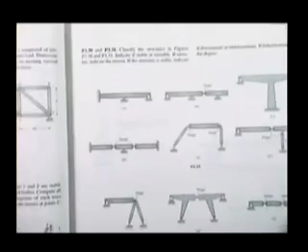A short, brief... just so you know, I've never seen anybody try and build something like this, so I don't think you have too much worry, but in your test, you should be able to tell if that is a statically determinate structure and if it is stable or unstable. You really ought to do it, I think, just about as much by feel as anything. Just counting joints and counting members and counting special conditions works a lot of the time, but sometimes those equations can mislead you.

You should know this is a cantilever beam. That's all it is, it just sticks out of the wall. They hold up nicely, you can imagine. Then all of a sudden someone came and added how many forces—not how many reactions, not how many pieces of steel, but how many forces. One is correct. So they put a roller underneath it, which causes one vertical force.

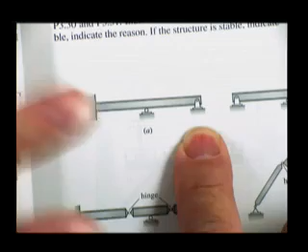Then on this end they put a pin, which caused 2 more forces. And so this is statically indeterminate to the 3rd degree, because it was fine as a cantilever till somebody started putting all these extra supports on it.

Now these extra supports are very useful. They make the structures much safer, because if it fails as a cantilever beam, it just falls in the water. But if it fails with it supported on these other pieces out here, you'll know it. It'll get a lot of failure in this area, and there'll be plenty of time to get off of it. So statically indeterminate structures are often made that way because they're very efficient, and also because they're much safer than statically determinate structures. There's a backup to a potential failure.

This is nothing but a simply supported... hey, yeah, that's right. This is nothing but a simply supported beam with an overhang.

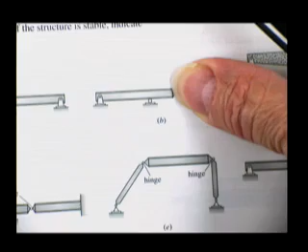And then someone took a thing that looks like that, which is not stable. You see it won't fall up and down, but put some loads on it, and there's a good chance it will rotate about that pin. To prevent the left end from moving up and down, and therefore to prevent rotation around the pin, he hinged it to something that's stable, and he's turned the whole thing into a stable structure.

For this one here, that would have stood up nicely as shown. Wouldn't have needed anything else. It'll just stay there, be a nice little roof structure. You can put it next to a bus stop and get underneath it. It's fixed to the ground.

And then someone came and added 2 forces. By adding 2 forces, they made it statically indeterminate to the 2nd degree.

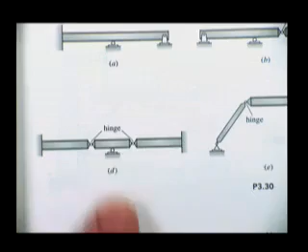This one here was a nice pair of cantilever beams, and somebody came in with a filler beam in between there. Had they hinged the left end of the filler beam on the left end, it would not have moved up, down, left or right because of the hinge. And then the right end would have flopped down to the ground until they added this right hand hinge.

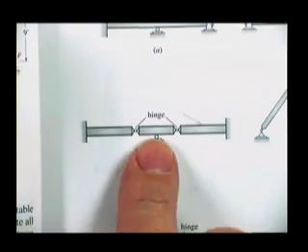At that point, it's statically indeterminate in the axial direction, because if I were to put a force on here like this, you really wouldn't know how much of it came out this end and how much of it came down through this and out through this end. So it is statically indeterminate to the 1st degree.

Now he could have prevented that by putting a roller and then putting the beam across the top like that, and then hinging it to this. That would have left this just as a simply supported beam by itself without any axial capacity.

Then you could have driven on the beam. And I'm not saying you'll get all of these right away, but you get a feel for them, and they're not that bad.

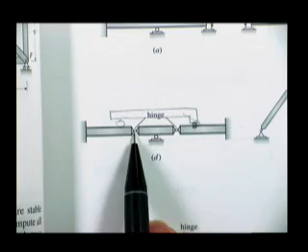By hinging it on the 2 ends, it's statically indeterminate in the 1st degree, before this guy comes around and messes with it.

And the next thing is he came and decided to put some more supports on it. He put one more support, so it ought to be statically indeterminate to the 2nd degree.

How about this one? What do you think about that structure? If you push on it to the right, what do you think would happen to the hinges?

They'd rotate, it's just that simple. Once you put a load to the right on it, this thing says, well, is it okay if I do this? And the guy says, well, no, you can't do this unless it's okay for me to move to the right. And he looks down here, and this guy says, it's okay with me, you want to move to the right, that's no problem. And so it is unstable.

Have I ever seen anybody start to build one of those and then say, oh wow, let me see if it's unstable, so I won't build it? No. And that's pretty unusual.

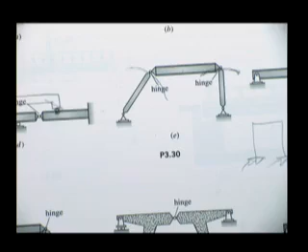Usually what you make is you make these things here, or you make these things here. That's usually the kind of things you do.

Then just start taking things off and see what's left. If I didn't have anything but that, would you tell me to duck? Well, I would hope you would. You may not, but I would hope you'd say that's not stable. The right end is nicely supported, except it can move left and right, and the thing could rotate about that point, so no, that's not a safe structure.

So somebody decided to do this to it. That at least keeps it from rolling about this point. Axial force is in here. However, it's still possible if you push to the right, the link would roll to the right, and then that axial force could not be taken because of the roller.

And the guy says, well, you haven't let them see everything yet. Well, okay, that's true, but right now, it's still unstable.

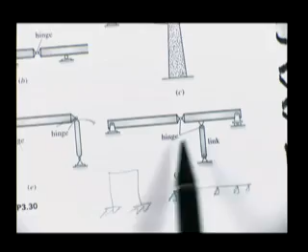And now then, here's that last force we're looking for. Horizontal forces through here will go through here, will not go through the roller because it's a roller, but will come down here in tension. And here's just a plain old beam, a simply supported beam. The right end of this simply supported beam is supported on something that won't move up and down, and the thing that could sadly move left and right can no longer move left and right.

Statically determinate, and it's stable. There's a truss—probably the simplest truss on earth. And it won't fall down.

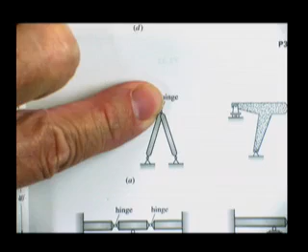You've seen trusses forever. Somebody came in and added another member to the truss. This thing was happy to stand as it was before you put in this additional axial force. So you are causing one more reaction, one more degree of indeterminacy, if there was any in the first place. There wasn't any in the first place. Therefore, you've added one. Wouldn't take you long to figure that out.

Once you cut this hinge in order to sum some forces vertical and some horizontal, you'd say, I got a problem here. I have two equations and three unknowns. So it is statically indeterminate to the first degree.

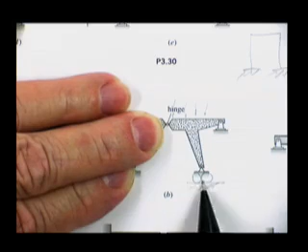That one would stand up by itself. It's hinged and it's got a pin. The truth is, if you would even change that to a roller, it would be okay, because when you put loads on top of it, it would tend to roll down, except this guy wouldn't let it. As you start adding things to it, you're going to add degrees of indeterminacy. So when he changed that to a pin, it became statically indeterminate to the first degree.

Then this one, it was okay because it was pinned. If you say the roller might lift off the ground, remember these rollers are made so that they can take tension. This is nothing but a convenient way to show you that the support is purely vertical—it'll take tension or compression.

Then when you put them together, you make it more degrees indeterminate. It's not hard to see if something's indeterminate, because once you try and solve for the forces, you can't do it. That tells you right off the bat it's statically indeterminate. Some of those structures we'll analyze by hand. Others, as they start getting ugly, you just don't have much choice but to go to a computer program and let it analyze the problem for you.

So, enough of that. We'll talk about more statically indeterminate structures later.

Trusses. Two basic ways to solve for the forces inside of a truss.

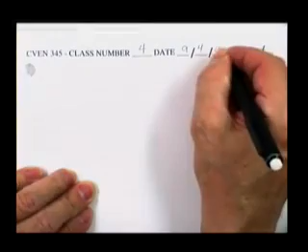Here's a truss. Typical.

I'll leave it for you to solve for the reactions.

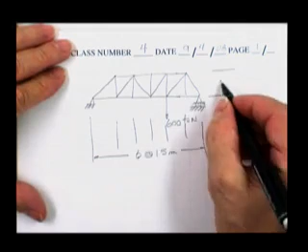A lot of times they'll show you the distance on each one of them. Sometimes they'll merely say 1, 2, 3, 4, 5, 6 at 15 meters, and you're supposed to know that's 6 equal panel spacings at 15 meters each. Height, 20 meters, not drawn to scale.

The first method of analysis you were taught for trusses was method of joints. Hopefully it was impressed upon you that cutting out joint J at this time was a futile exercise, because in order to isolate the piece of steel, the little pin at J, you cut through 5 members, thereby exposing 5 unknowns. May be useful later on, but at this time, too many unknowns.

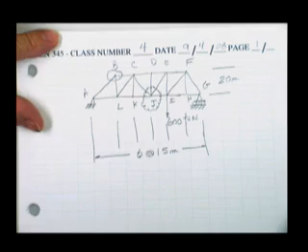At this point, it is futile to cut out joint B, because in order to isolate the piece of steel at B, you had to cut through 3 members. Those 3 members all have an unknown force in them. You only have 2 equations of statics, sum of forces horizontal and vertical. You've lost your sum of moments equation because all the forces go through point B.

So plan on it: if you want to use the method of joints, you'll have to cut out a joint that has no more than 2 unknowns coming into it. If you've already worked this member from earlier work, and this from earlier work, and this because it's a zero force member, then you could solve for these 2 by method of joints, because you only have 2 unknowns coming into the joint at that time.

The reactions on this structure, as I say, I'll leave that to you: 400 kilonewtons and 200 kilonewtons. And the reason I know that is because this is 4/6 of the way over to the support, so this is 4/6 of the load, and the same way in reverse. But you're more than welcome to just sum moments about A to find the answer for those reactions.

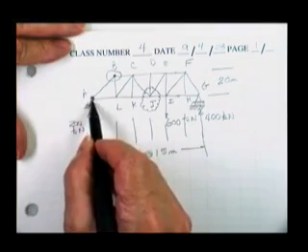That tells me that quickly I probably have the ability to solve for forces in the members entering this joint, because there's only 2 of them, or this joint, because there's only 2 of them. For no reason whatsoever, I'm going to tell you I'm looking for the force in member FG.

In order to solve for the force in member FG, you must cut member FG, thereby exposing the force in that member. Then you go ahead and cut around the joint, cutting as few additional members as you can, and cut through the reaction, and cut through any external loads—the lines of gravity through those loads—and isolate the joint.

Here's what the joint looks like. Joint G has a cut steel piece and a cut steel piece and a reaction: 400.

The slope of this member needs to be shown on the member, either here or on the original drawings. It needs to be somewhere. It has a horizontal slope of 15 and a vertical slope of 20, so that's a 3, 4, 5 triangle.

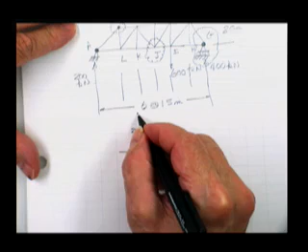This is horizontal, so I don't need to show anything on it. As soon as you cut through the piece of steel, you need to put an arrowhead on the unknown. That's normally a guess, sometimes better, sometimes worse.

Crawford, which way do you think it goes? Pretty... No.

Even though it tells... I know, I do too, but I'm okay because as long as I'm talking, I don't nod off. Also, I've already passed this class.

And it has been guessed intentionally, and that may be wrong.

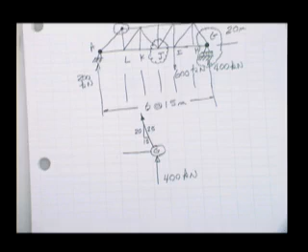Now then, I'm going to guess that the force in this member is also tension, and it's a pure guess. Right or wrong, I don't know - I mean, I do know, and I think you know too. But if you say those are some pretty bad guesses, yeah, but I want to make sure you know what to do when you don't know what to do.

Just have to guess and put some arrowheads on there. I get all kinds of students who I ask, how come you didn't work the problem? Well, I didn't know which way to put the arrowhead, so I didn't want to get it wrong. But you've got to put the arrowhead.

When you sum forces vertical, you've got to commit. I say it goes this way. If you're wrong, your answer will come out with a minus sign. The minus sign won't mean it goes down, left, right, or up - it won't mean anything except you're not a very good arrowhead guesser. Put it on the other end.

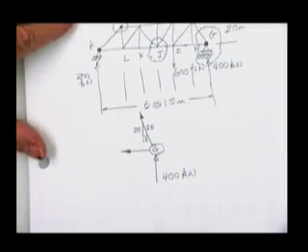And it has to have a name. Probably a reasonable name for the force in that member would be FG. You can call it dog, but it's a little harder to figure out where it belongs. And this would be HG. It has to have a name.

Especially in this class, you'll be doing a whole bunch of these. And people who say, well, I've got 4 free bodies there, and I used this one for a while, then I went over to that one, then I came back to the first one, and then I went over there - I can't follow your work.

If the answer in the box is right, you get full credit. If it's wrong, you get nothing. When you bring your paper up and say, look, I only have one little mistake - I took the horizontal component of this as 20/25 by mistake.

Well, sorry. You need to tell me, hey, boss, yes, I'm using free body number 1, it's okay with me, and my first equation reads... and then if you get down somewhere and get an equation that doesn't do you any good, you can't proceed, and you move to another free body, then you tell me, equation 8 is using a new free body. Then I can follow your work step by step.

Where you make a mistake, I can take off a point or two, that's all I'm going to get, and then I would assume that everything you did from then on is not incorrect, based on what you've already done.

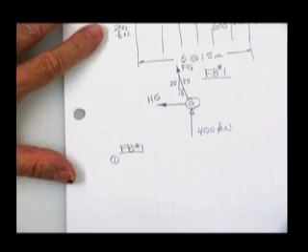Yes, you can sum forces horizontal, and yes, it'll be useful later, but there's only one guy that's got a vertical up and down component to it - only one unknown. So I would suggest you sum forces vertical is equal to 0, is equal to plus FG.

And then you say, well, now wait a minute - I'll admit FG kind of goes up, but all of FG doesn't go up. Just a piece of it goes up, and that is correct. Only 20/25 of it goes in the vertical direction.

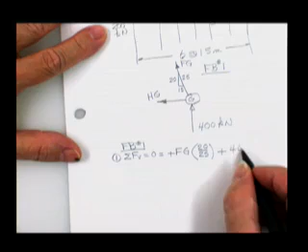Plus the reaction is 400, and therefore you can solve for the force in member FG, which is equal to minus 400 times 25 over 20. That's 2 into 40 is 20, 20 times 2 and 25 is 50, so it's 500 with a minus sign.

Now what you do with that is your business. You're welcome, and appropriately or legally permitted to go write that the answer for FG is minus 500.

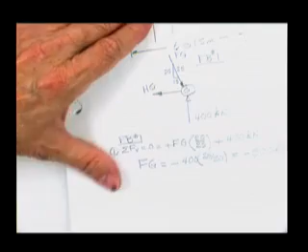But the number of people, students and practitioners alike, who'll miss the minus sign later on are numerous. I'd really suggest if you find an arrowhead wrong, you don't have to tell everybody, just go put it on the other end, and then no one will ever know you're not good at guessing arrowheads. It kind of makes sense, since this thing goes up, this guy probably goes down. Then you need to change your sign, so if someone checks your work, he doesn't see a plus where the force is going down and count off. Change the sign for FG, that changes the sign for the answer, and that means leave the arrowhead alone. It also means that the force, since it is pushing on G, is a compressive force.

Most especially in this class, it tells you whether the member will be getting shorter or longer. Lane, which is it? Will the member get shorter or longer?

Shorter. Look at that, what a good guesser he is. He had no idea in the world. You can put your quarter back in your pocket. Came up heads, and it served you well. Being in compression, the member does get shorter.

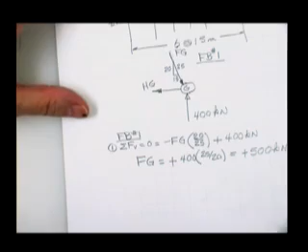Do I care if you sleep? Well, not really, I hate to admit that. Does it bother me? You really don't. But I'll tell you, I only got through one class because the guy was merciless with me. He would throw stuff at me, he'd stick chalk up my nose, and that's the only way I ever got through that class. So I'm going to try and do that with personal friends like Lane. Who was the other one? I forget.

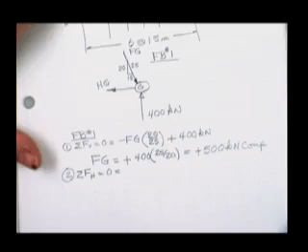All right, so now then we have that force. Thank you, ma'am. Equation 2 reads, sum of forces horizontal is equal to 0, equal to minus HG plus... I wish I had listed that answer on the free body, it would have been smart, because then I wouldn't have thought it's unknown. I should go do that now.

500 kilonewtons. I probably wouldn't put compression on this because it is shown pushing in compression. Plus Fg, which is 500. But not all of the 500 points in the horizontal direction.

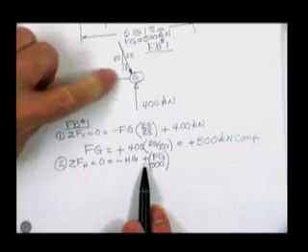No. All right, well, let's see. Oh yeah, I was asking you how much of Fg points in the horizontal direction. Now, that really is something that everybody ought to know, but you really should. The horizontal component of this slope triangle, which is a 3,4,5 slope on the triangle, is in the same proportion as the components of the load. So Fg does point to the right, hence the plus, but only the horizontal piece of it points horizontally. In other words, 15 out of the total of 25 available.

Now, you may not have done it that way. You may have said the tangent of this angle is 15 over 20, written the angle in there, and then multiplied this times the sine of that number of degrees. You're welcome to do that if you want to, but that's a long, hard way to do business.

Morales, how would you do it? Mumble, mumble. So that's an old trick, you mumble mumble, and the guy, you know he's old and deaf and can't hear, and they say, that is correct. You would multiply it times 15 over 25. And you say, thank you, Lord. I know.

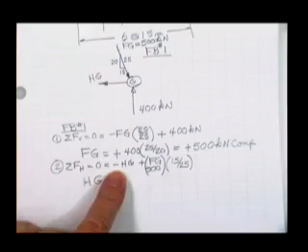ΣF horizontal equals 0, so we ought to be able to solve for the force in member HG. Whatever that force turns out to be, I have little interest in it, it's a calculator problem now. The minus sign will turn around to be a plus on the other side, so it will turn out appropriately shown. The arrowhead does not need to be reversed. It is a tension force in the member.

Now, the only other thing I would do is go ahead and show you a free body for joint F, just to make sure you know what to do with what you've already solved for. This is an exercise in futility, because cutting joint F has exposed three new unknowns. Even though one of them is now known, that means we're not going to get answers, but at least I want to make sure you can properly draw the free body.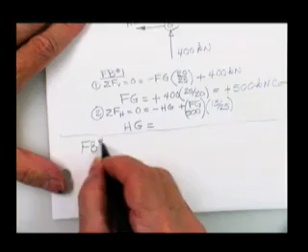Here would be free body 1, here would be free body number 2. Here's the piece of steel, marked F on the end of the pen. You cut this piece of steel open. It is your choice, pick an arrowhead. I will tell you that for most trusses normally loaded, the entire top of the truss goes into compression, and the entire bottom goes into tension. That's normal.

Other loadings can cause other kinds of things where that doesn't turn out to be the case, and you shouldn't get so enthralled with the general rule that when your answer comes up with a minus sign, you don't listen to the minus sign.

Yes sir, for the homework problems on method of joints -- yes sir. If I were to write a MATLAB program that just solved it, can I hand them the code? Not really, and the only reason I say that is...

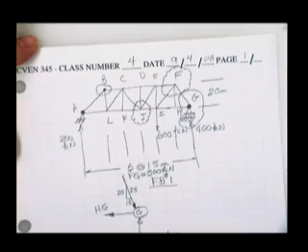Because everybody already has access to a structural analysis program called Visual Analysis. Some of you have already learned how to use it in other classes. And then I'd really have to say, well, it's okay just to stick it in Visual Analysis. The real problem is when you get out in practice, you're not going to have that available to you. If you say, you know, when I get out there, I already know how to do that, and you're just wasting my time, I have to apologize -- you may be right, there may be some truth there, but I don't know how to really make everybody do this except by hand at least once in their life.

Okay, all right, so it's your choice. I'm going to show it pushing, just because the top of most trusses are in compression. I'm also going to give it a name, EF. I have also cut this member here, his name is IF or FI. I do not know which way it goes, so I'm going to absolutely guess. Well, I didn't know which way this one goes either, so I'm guessing both of those arrowheads.

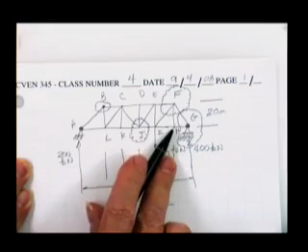Then I cut through FH or HF, depends on whichever one I wrote first on another free body. I wouldn't want to call this force FH here and then call it HF later in my work. They are of course the same number, same answer, but you're liable to get lost somewhere. Whatever you call it, if you call it FH now, later on you ought to call it FH again. This guy is FH, and that is an absolute guess.

And only on the next one, FG, are you stuck -- you have no choice. On this one you must show it as a pushing arrowhead, because that's the truth. That's the first truth we found, but it is truth, and therefore this one is required. I don't know how... maybe I'll just put several arrowheads on there. I mean, there's no question about it -- it's got to be shown as a pushing piece of steel.

Now if you say, well wait a minute, you showed it down on this one and up on that one -- no, I didn't. I showed it pushing on this one, and if his feet are pushing down on this joint, his hands are pushing up on that joint. And then, of course, it has the name FG, because that's what I named it earlier. I don't think calling it GF is a wise move at all.

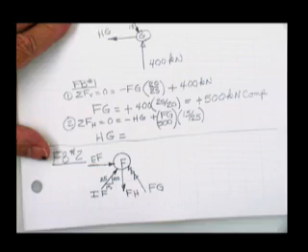The final thing this needs to be a free body is this needs to have a slope on it. It's poorly drawn to scale -- that's a 15 by 20 by 25, you could go ahead and revert that to a 3-4-5 if you want to. And this one also has the slope 3-4-5.

You would then sum some forces horizontal, some forces vertical. You would, of course, find that you cannot solve for all the forces because you have too many, and we knew that was going to happen.

Now, some of these members can be found just by looking at them. You can just tell what the force is. Here's an example. Well, let me show you a more general thing, and we'll go back to this.

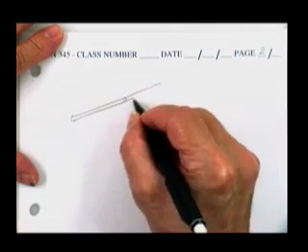Here is a member, and here is another steel member, and they are collinear. They are pinned on the ends, and they are pinned together, and they're supposed to be straight. Normally I wouldn't care about slight discrepancies like that, but I really have to emphasize the fact that those two members act along the same line. I don't care how they're sitting in the structure, but they're in a straight line.

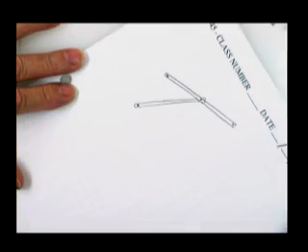If a third member comes into a pair of collinear structural members, the force in that member must be zero. This is called a zero force member.

And the reason is, I'll let you put any force you feel like. You say, well okay, I'll just put 100 pounds. Then if you put 100 pounds, with theta as the angle, you're going to have 100 cosine theta acting on the joint because of this member, and 100 sine theta acting in this direction. Now you can throw away the original member.

This is unacceptable. You have a force pushing up, and you have these two members. One of them is doing this, one of them is doing this, and here you are doing this. There's no way these two horizontal forces can take this vertical force because they don't have any downward pointiness to them to accept that.

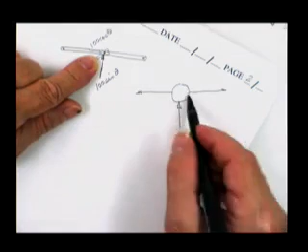If you sum forces vertical right now, it's equal to 100 times sine theta minus nothing. Nobody can take that vertical load. You say, well okay, I won't put 100, I'll only put 1. I don't care if you only put the weight of a fly's eyeball - you can't take a component normal to those two members.

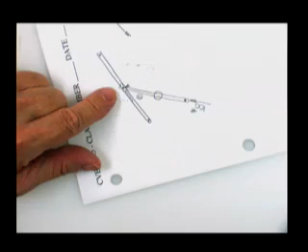So I'll tell you now, if you ever see a structure where there are two collinear members coming in with no applied forces - if there are applied forces, this rule drops off - but if you see two collinear members and a third member coming in, it has no force on it at this time. Now, a lot of people say, well what's it there for, why did we buy it? Well, later on, when the loads move to a different spot on the truss, it may well be used. But right now it's got no force.

A corollary to that, or simplification, is listed in our book first. If you ever have a member with another member coming in like this, and there's no force on the joint - we only put forces on the joints - then those are both zero force members. The reason being, if this member had any force at all, it would have a vertical component. If it had a vertical component, you could not satisfy sum of moments about this point, because that force acts right through this point, so that's zero.

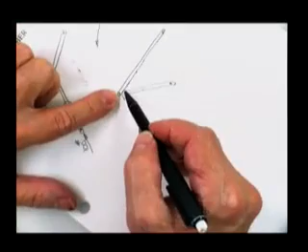And by the same token, if you had this member and you're trying to see how much force is in this one, if I let you put a pound in there, it'll have 1 pound cosine theta, and that will cause rotation about that point, and that's not permitted. You can also look at it as this being the same as this.

There used to be another member here, and there are your two collinear members with somebody coming in at an angle and no other forces acting on it. That's a zero force member. You say, well but there isn't one there. Well, it's okay with me - the rule still applies. Just because you took away that member, you just made it even more zero.

And by the same token, here are a pair of collinear members. If you don't want that one in there, if you want to take it off, that's acceptable too. Here's a pair of collinear members with somebody coming in at an angle. That's a zero force member.

Hence... you'll have to bear with me a few times here.

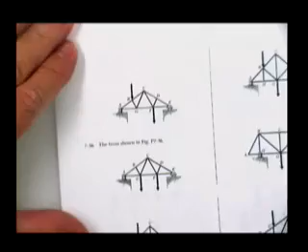Give me a zero force member. BG? The rule won't apply there because on this end of BG there is a force. Those forces make the rule go away. But you might say, well, check the other end.

When you check the other end, the rule is broken because you have another member coming into the joint. DF, I agree, DF is a zero force member. It looks like it's coming in square with those other two, but I don't care if it comes in square or not. If it comes into a pair of collinear members, there's no force in that member.

Now how about this one? The rule breaks down because there's a force here.

How about this one right here? Give me a zero force member. DG, FG. Now, because that member is zero and could be removed...

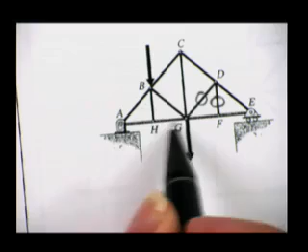DG, that's correct. And who else? BH, that's correct, because on this end there's a pair of collinear members, so that's zero. And I believe at that point the rule falls apart, because if you try for CG, down on this end it's a mess. There's all kinds of stuff going on down there. There can be no members coming in and no extra forces coming in.

All right, how about this one? This is the one I got, yeah. DH, BH. I like BH, not because of the top end, because of the bottom end.

Now students will look at that all day long and say it's impossible. Where did that force P go? Well, I don't know, but it didn't go down BH, because on this end of BH, these members can't support it. So there's zero force in that member.

So where did this go? Well, I guess it went down this side and down that side, because it didn't go in BH. And I don't see any more zero force members in there.

How about this one? BG is good, keep going. DF or FD is good. And I think that's about all you're going to get.

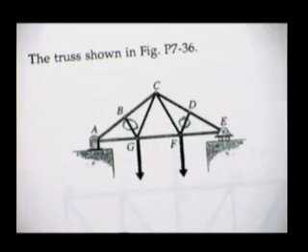GC, those do start becoming obvious. AB is good, and AH. Again, if you want to pretend that this member AH has a buddy sitting out here, a pair of collinear members with somebody coming in, it's zero, and then you can throw it away and the rule doesn't change. It's just that member is also removed.

By the same token, if you say, here's the member I'm talking about right here, and this is the guy coming in at an angle, the other one is zero. And I don't see any more.

EJ. BJ, I buy BJ. HF, very good. EH, now wait a minute, there's a bunch of members coming in here.

Let's check the other end, he says. Okay, I checked the other end and you're right, because this is a member coming into a pair of collinear members, EH is zero. DH is also true because now EH and FH can be erased, leaving DH as a single member coming into a pair of collinear members.

And of course the question definitely becomes, what's all that steel for? Well, when these trucks get around on this side, or there are heavy loads on the top of the truss, that steel will be used. They're just not being used now.

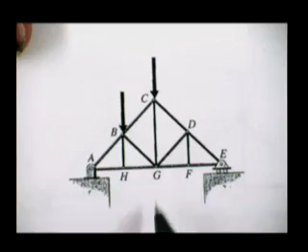BH, I buy that. DF, I buy that. DG, because you can now erase DF, DG becomes a zero force member. That's correct.

And one last one: DF, CF, CG, BG, HB, and AH. That's true, they're all zero force members.

They have no choice. You're welcome to solve for them if you want to, but it takes a lot of time, and on the FE exam, you don't have a lot of time. They love zero force members on there because they figure you ought to just be able to point them out.

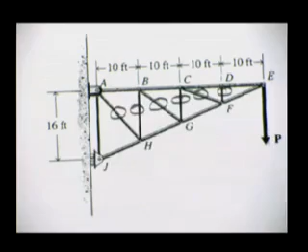Now, if you say, well, where's the force going? It's evidently going down this member in compression and probably pulling on this thing in tension, and these right now are not being used. When that force P is back here at this joint, or this joint, or this joint, they'll start being used, but not right now.

The second method of analysis, you can use the method of joints all over the place. You can follow from joint to joint to joint, and you can usually get answers all the way across the structure. Every time you move to a new joint, you do take a chance, because the first time you made a mistake, that mistake's then going to follow you along through all the other equations.

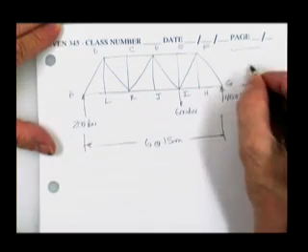Now, if I ask you to solve for the force in member DE, to get there by method of joints would take a while. You'd have to start out here at G or A. Without a doubt, you'd start at G because it's closer, but it'd still take you a while to work over there.

Method of sections has the advantage that you can usually get an answer immediately. Plus the second advantage, it doesn't depend on much previous work. Now, if you have these reactions wrong, then obviously you've got a problem.

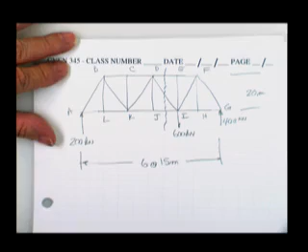To get the force in a member, for example DE, you cut through DE. That exposes the force you're looking for. You then cut on through the structure as inexpensively as you can, cutting as few additional members as possible, hopefully 3 maximum total, because that's all the equations you have.

And you draw a free body of that substructure. That substructure looks like this. There's joint E, there's joint F. Here is each of these members, approximately cut in half around the middle. Here are the loads. Here are the slopes—the only ones I care about are the ones that are exposed.

That's a 3,4,5 slope. My guess on the arrowhead on this one will—if it's on the top, it'll always be compression, as it usually is compression. I won't get so attached to it that if the answer comes out minus, I'm not willing to change it. And it has to have a name, DE.

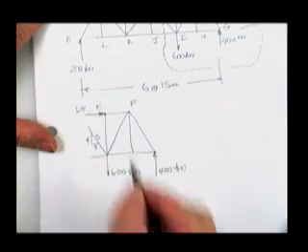I have no idea which way this arrowhead goes. Anybody want to guess whether it's a tension or compression arrowhead? Tension, so we'll show it as a tension arrowhead. His name is DI.

And finally, these on the bottom are usually tension. And his name is JI. It has to have a name.

It's free body number 2. Why is it free body number 2? Because the whole thing was free body number 1. That's where I got the reactions from.

You have to have dimensions. You can pick them up from the original diagram if you want to—15 meters. They're usually worth the effort to go ahead and draw them on the free body itself.

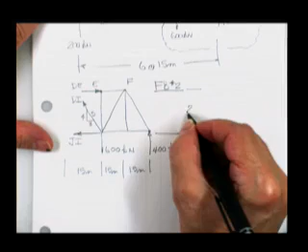So now it's a free body. Now it's soup. All of the cut members have arrowheads, guessed, and names. Anything that's been cut has got a slope on it, so I can get components from it. Everything else, for example reactions or loads that are inside that free body, is shown on the free body. And nothing external to that free body is shown, because you're supposed to be able to make that little set of steel bars sit still just from the things you see in the free body. You shouldn't need any outside help.

Now I asked you to solve for DE, and therefore you like DE. Why do you like DE? Because the guy's willing to pay you to tell him the force. And remember DE.

Who do you hate? I really hate DI, and I really hate JI. The reason I dislike them so intensely is I'm not being paid to find them, and if it wasn't for them, I could just sum forces horizontal and get an answer and go home.

So what I do is—same thing you do if you're mad at 2 people—you wait till they meet at a bar. You take your big stick and go between where their seats are, and you sum moments. And that gets rid of both of them right off the bat. Boom, they're gone. They're not in your equation anymore.

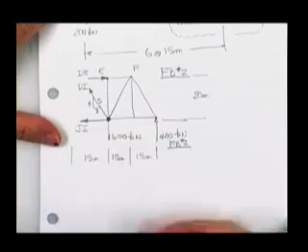So the equation reads, using free body number 2—my first equation is... actually I probably already had 3 equations up on the first free body. It's probably about the 4th equation, unless I did some free bodies of joints, who knows. Sum moments about this point, point I.

Now see, that's what happens when you go to sleep. Somebody help him off the floor.

Sum of the moments about point I is equal to 0 is equal to—first I see a 400 kilonewton force. Summing moments about I, I find out how long it is to tie a piece of string to him, to as close as that string ever gets to his line of action. That's 30 meters.

And then I kick him off of joint G and let him start rolling. The string gets tight, and he starts rolling this way about joint I. Since that's the way my right hand is made, I normally call that a positive tendency to roll. It's up to you—you can use any sign convention you like as long as you're consistent.

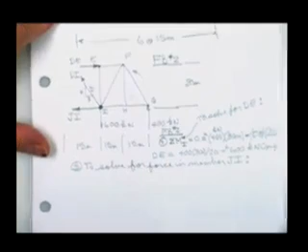Yes, sir. How is it that DE is in compression and not tension? Well, from looking at the whole thing point of view, when you pull down in the middle of a beam, the top of it gets shorter. In other words, you're trying to pull it between the supports, and the little piece on the bottom tends to get longer because it has further to go. So that's why, from that point of view. From the point of view of you guessed the arrowhead as compression and turned out to get a positive answer for the result, that it's compression for that reason, because it is guessed pushing, turned out it is pushing, and therefore it is compression. You can also see when you sum moments about I, see how this guy wants to do this?

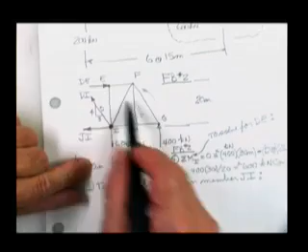Well, this guy has to resist that bad attitude. Now, I'm not sure that's the answer to your question, but by now you've usually forgotten it, so I'm usually okay. Is that okay? Well, come see me, and we'll look at it more if it doesn't make sense. Because those are the basic kind of things that if you say, who cares, man, why did the guy ask the question? If you're not curious and you don't wonder about these things, you're not going to make a good structural engineer.

You'll be one, but you won't be a good one. So come see me. To solve for the force in member JI, who do I like? Now, where's the money? JI. Who do I hate? Everyone else. That's true, I hate DE. You know, we really probably should have listed that answer as soon as we found it.

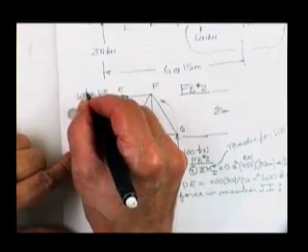600. Probably wouldn't write compression on there because it's shown compression. Yeah, I hate DE and DI. You say, well, rather fickle, aren't you? You know, a minute ago, you liked DE. Well, 10 years ago, I liked my wife, too, but you know, these things happen.

The reason I don't like it now is, first place, it could be wrong. In my case, incidentally, she always was wrong. And if it's wrong, that'll influence this answer here. I don't like that, and I don't like that. And so what am I going to do? Something ugly. What? Well, I follow them until they meet at a point.

You know, I worry about you. There are much more acceptable ways of settling those kinds of disputes.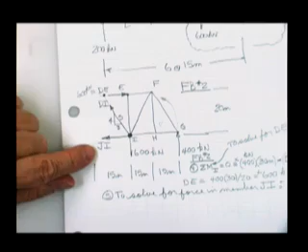I'm going to sum, you can even tell where I'm going to sum moments about, because the two people I don't like, they have the same first name. I'm going to sum moments about D. Summing moments about D will get rid of these two people that may cause grief, leaving only this person hanging out in the free body. To solve for force in member JI, sum moments about D.

So we sum moments about D, equal to 0, equal to, we see a 400 kilonewton force. We notice that if we tie a string, here's the string, you'll see it looks wiggly. Here is the line of action of the force. There's where we tie it to that point right there. That's the moment arm, the shortest perpendicular distance between the force, the line of action of the force, and the point you're summing moments about. And that's 1, 2, that's 3, 15-meter numbers. 3 times 15.

And his tendency to roll, once loosed and the string gets tight and it starts to roll about D, would be this way.

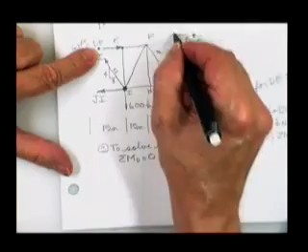That's a positive tendency to roll. Next, I see this 600K force. I list it without respect to up or down, right or left, minority, non-minority. I just write the number down. Next, I find out how far it is away from the point I'm summing moments about.

In order to do that, I get on this train. It's like you get on the railroad tracks, and you huff and puff along until you get as close to this point as you're ever going to get. And therefore, I go up here, I go up here, I go up here. That's as close as you're ever going to get.

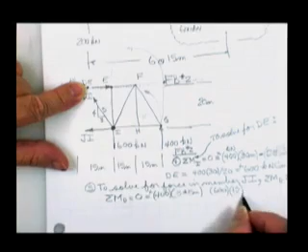The length of the string to be tied to it is 15 meters, so it has a 15-meter moment arm. Were he to get away from you, tied back here to this string, he would roll that way about point D. That's not the way my right hand is made.

I'd call that a negative tendency to roll. DI has no moment arm. DE has no moment arm. JI is all that's left. There's JI, his moment arm.

Tie a string to him as close as he ever gets to you. As soon as he comes past, tie a string to him. The length of that string is 20 meters. The tendency to roll, should he get away from you, tied to the string—if you don't see these, you need practice—is a negative tendency to roll. And from that equation, we can solve for JI.

Equation 6, this is easy, to solve for the force in member DI. The only reason I'm solving for those particular member forces is because they're the ones that were exposed from the only free body that I've drawn.

Who do I like? DI. Who do I hate? DE. Who else? Here, let me ask my old friend back there, Lane. Lane, you're going to have to learn to sleep without laying your head in your hand. You don't have a prayer. No, it's okay. But yeah, I'm picking on you, but it is okay.

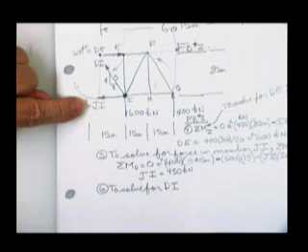Now you say, well, I don't know why you don't just go ahead and sum forces horizontal. Nothing wrong with it. Plus 600 minus 450 minus this guy's horizontal component. What's hard about that? Nothing. The only problem is if that's wrong or if that's wrong, then you got another wrong answer. Usually you can find one of those equations where these other people will drop out. If they don't meet at a point horizontally, that means they're acting horizontally. So if you'll sum forces vertical, you really get a quick and easy answer.

To solve for DI, sum forces vertical equals 0. And so then we simply have: sum forces vertical equals 0 is equal to minus 600 plus 400 plus DI.

Booth? You happy with that? Is it finished? Oh, you want a factor applied to this? Why do you want it? What's the factor going to do? What's it for?

Very good. DI doesn't act pure up and down. Only a piece of it acts up and down. Did you say 3/5? Okay, times 3/5 times 4/5. That's probably what you said. I just wanted to make sure you were seriously committed to 4/5. The reason it's 4/5 as opposed to 3/5 is you're not looking for the horizontal component. You're looking for the vertical component. And you solve for the force in member DI.

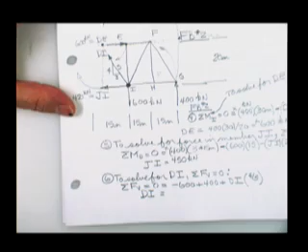And now this one is going to come out tension, actually. And if we'd have thought about it, we could have pretty well determined that before. You see the 600 is beating up on the 400? You see how this guy is winning? There are no winners in statics. This guy needs help up. And so that arrowhead doubtlessly does go up.

Seemed like last time I asked what time is this class over, and somebody told me now. Then I got home and realized you lie. That was your 305 class. Was that my 305 class? Yeah, I was sitting in on that.

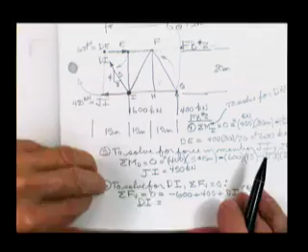All right, okay. All right, so you should be able to do that. Let's try one. Pop quiz.

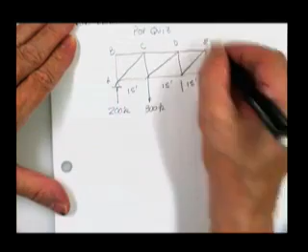Is it supported by anything on the other side? Yeah, no, these are the supports at A and F, and I went ahead and gave you the reactions, and this is one 300,000-pound truck called a uniwheel truck. And I'd like for you to solve for the force in member DH.

You can work together on pop quizzes. I admit it may be embarrassing to ask the guy next to you for help, but it's better than not getting a good grade on a pop quiz.

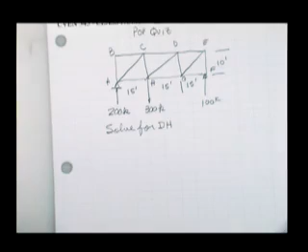Which side would you circle, the left side or the right side? The right side, I kind of agree. There's only one thing over on that side. Not that circling the left side would be any much more difficult. I want you to solve for that, this one right there, that slanted member.

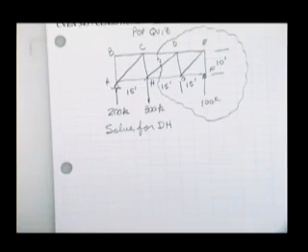Here, let me help you here. Let me help you. Some forces. No, it's too late now. Sum of forces is equal here. Let's cover up your name because that would be embarrassing. Is equal to plus 200 minus 300, plus DH, but we don't want all of DH.

How much of DH do we want? 10 to 18, 18ths. All right, well, you may be right. It may come out, that may be what it is. Did you get 180? 180.3. No, I don't care about that. All right, you were right.

Listen, I want to see equations from now on, okay?

Now, my question earlier, tension, yes. Yes, sir, was you called this in compression? I called it compression. Okay, I don't know this guy and I don't know that guy. Okay, but you were going from this point. That's correct. Well, it's not a matter of going from this point, it is that this was shown pushing on the joint, and that makes it compression. I thought that this was tension and then that was compression.

Well, this is tension on the member, but look what this tension in the member does to this point. Okay, so we're talking about at the point. Pulling on the joint means pulling on the end of the member - that is tension. You see how that's pulling on the joint? And so that's tension. If you had somebody pulling on the joint, that means the joint's pulling on him. That's tension.

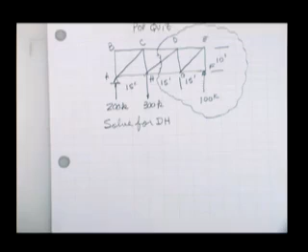Were we supposed to find the homework assignment on your website? Yeah, on CE notes, I couldn't find it. No, the problem is - wait, what is this? Are you Morales? Are you Garza? Where's Morales? You're not just handing in something for him, huh? It's on my website, lowry.tamu.edu. I know most all the profs put their stuff on CE notes, mine just happens to be where I can get at it. Well, I found the first one on there, so I didn't even realize there was an assignment due. Put a note on there and say 'I didn't realize where to get the homework problems,' and I'll sign it when you bring it. Yes, sir. But once only.

I'm in the same boat as he is. Oh, I don't believe that. No, only one guy could be that... CE notes, alright, same thing.

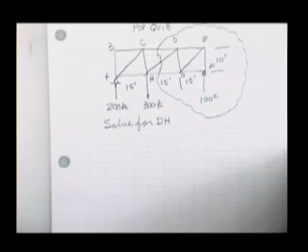I was wondering, how come on the windward side of the building the force is different, but on the leeward side they're the same? That's a little hard to explain, and there's a lot of theory involved, and I'm not a wind guy. But basically what happens is when you have something in the way like this, down at the ground the higher up it is, the more pressure you get, and that kind of makes sense. But this wind that's going around is the same as this wind that's going around, so you get the same suction all the way up.

Now, if it were not true, I would not tell you so. And the same way in the back, you get the same suction back here. I imagine the first guy that put a pressure transducer back here said, 'You must be kidding - this thing is 200 feet in the air, and it's got the same suction at the top as it does on the bottom.' And the guy writing down the data says, 'If you don't like it, we can lie about it, but I don't know what else to tell you.' So we're kind of in that boat.

I was sick on Tuesday, I have a note. No, I don't need that. No, but for the pop quiz. We had another pop quiz in here? I'm asking, did we have a pop quiz on Tuesday here? Yeah. Okay, well, remember what it was? No, I don't remember what it was. Getting out of the pop quiz, alright.